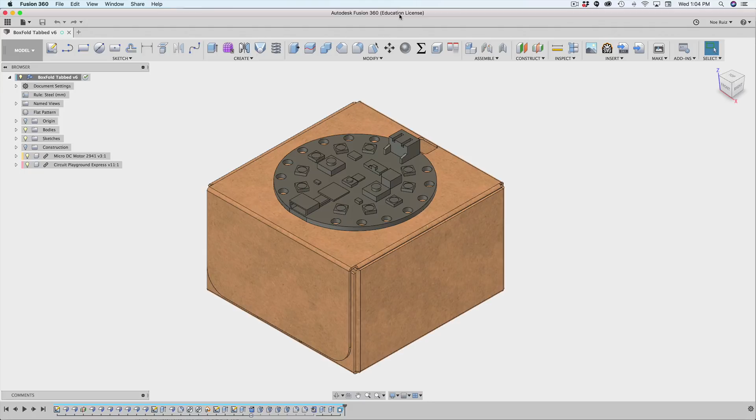In today's tutorial, we're going to take a look at using sheet metal tools inside of Fusion 360 to make enclosures out of paper, or chipboard in this case, to make enclosures for your electronics. So here I have a little paper box that is fully assembled using the sheet metal tools inside of Fusion 360. I have a couple of components here.

I got my Circuit Playground Express that's mounted on top, and I have a micro DC motor mounted on the side. And then in the inside of the box, I could fit things like the battery or wires and things. So what's pretty cool about this is that you can unfold this design and export it out as a flat pattern for cutting on vinyl cutters, like the Cricut machines. So let's take a look at that.

I'm going to switch over to the sheet metal tool, and I'm going to activate my flat pattern. And what you'll see is Fusion will go ahead and unfold. It'll take the box and turn it into a flat pattern, so we can export this out as a vector, as a DXF file. And then we can bring that into our software for cutting this template out of chipboard.

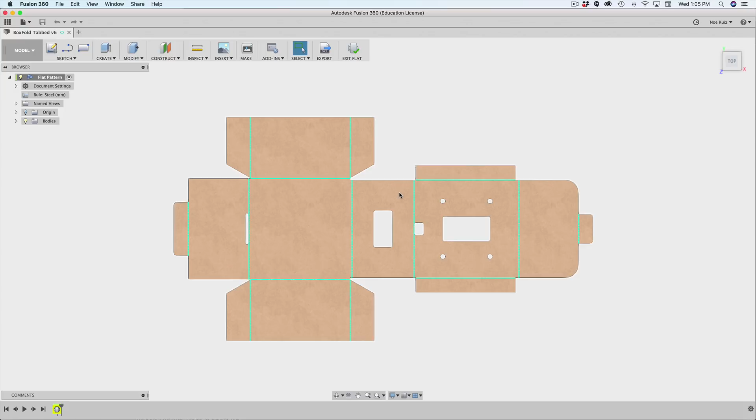Chipboard is a material that's made out of paper, but it's thick enough to do sort of 3D dimensional boxes or even paper crafts. So it's really cool. So I'm gonna hit exit flat, and then it kind of brings it all together. So it's really nice. This box is actually one piece, and it has a little sort of tab insert that gets slotted in here, and it kind of just secures itself.

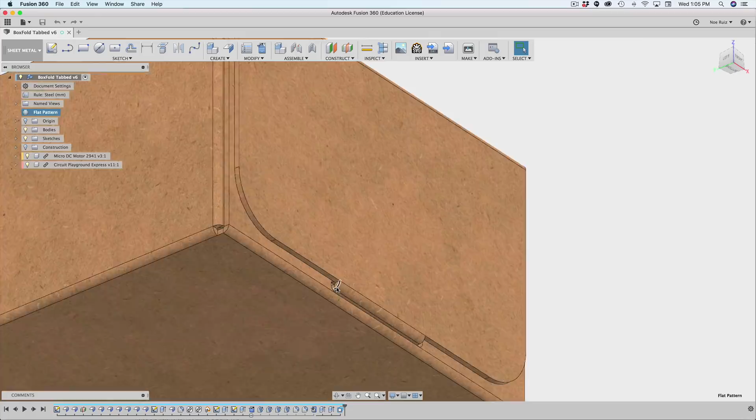It's a nice little housing for electronics, and when you can cut it out of paper, it makes it a lot easier than having to do something like 3D printing or CNC milling. So that's really cool. So let's take a look at how we can design a box inside of Fusion 360. So I'll make a new design, and I like to use my grid just to kind of see where I am in space.

So there's my grid, there's my floor, and what I'll do is I'll switch from model to the sheet metal workspace. And inside here, you'll notice that our tools kind of change a little bit. For the majority, most of the tools are here, sketching tools and whatnot. But some of the create stuff is different, and the modify stuff is a little bit different. But we'll get into that.

So let's go ahead and start off by making some user parameters, because we're going to make this a parametric design. So I'm going to pull up my toolbox and type in param for change parameters. Open that. Let's go ahead and make a new one. I'm going to make this the width. Let's go ahead and make it 50 millimeters. And I'll make another one. Let's call this length. This will be 60 millimeters.

Let's go ahead and change that 50 to 60 because I actually want them to be the same on the width and the length. So let's go ahead and add another one, make it height. This will be, let's say 30 because it's a little bit smaller, so it's like half the size. That's okay. Now we can start sketching out our box, right?

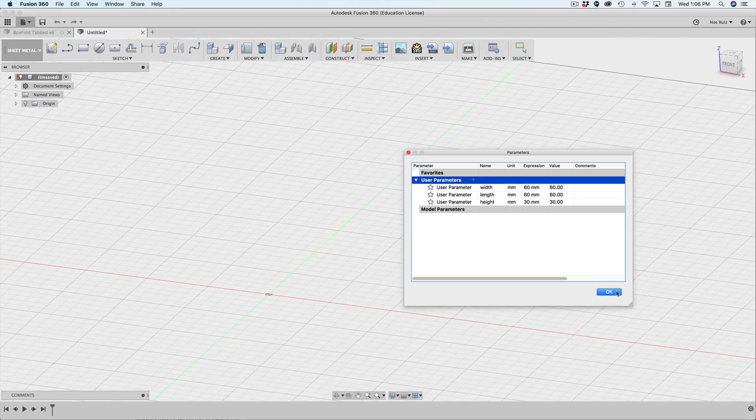So I'm going to use the sketch tool, and I'm going to draw on this flat plane here, this kind of floor plane. So I can look at it from the top using my view cube, and then I'll use the rectangle tool using the hotkey R, and then I'm just going to drag this out, and I'll just make it like that. I haven't assigned any dimensions to it, so let's go ahead and do that.

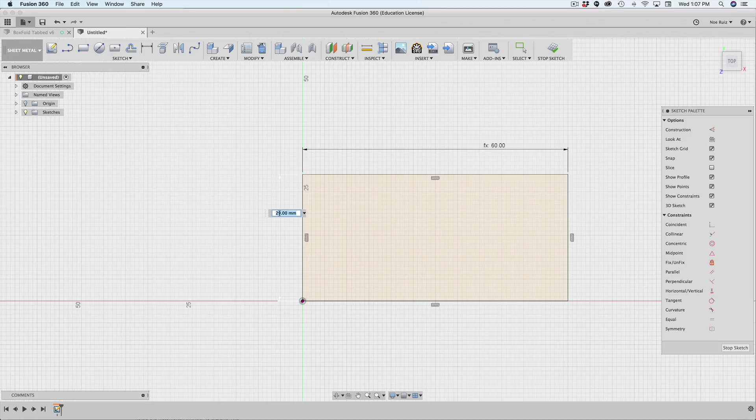I'll make a dimension for this guy up here. Let's make this the length, and then this right here will be the width, this guy, right there. So let's make that width, and that should be 60 by 60. And now we can hit stop sketch.

All right, so now what we want to do is we actually want to create this to be our base for our box, right? It's gonna be kind of the floor, the sort of base bottom of our box. So what I'll do is under create, you got the Flange tool. We're gonna be using Flange a whole bunch, so get used to it.

Instead of extruding, you can extrude, but the Flange is what's gonna kind of start our box here. So I'm gonna use the Flange tool, and this is gonna extrude it out because I already have the profile selected. If you didn't, it would look like this. So you gotta hit the little plus button and then select your profile, which is our little rectangle here.

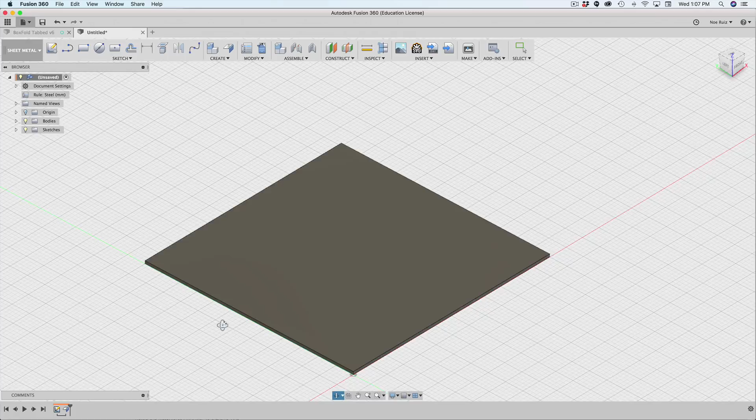All right, so the next thing I'm going to do is I actually want to hit OK, and that's our base. But by default, you may have to modify your sheet metal rules. So under the modify menu drop down, we have something called sheet metal rules, and this lets us set how thick we want our material and how much of a bend we want in our material. So I'm going to hit the steel right here and then hit the little pencil icon to edit it. I've already went ahead and updated this.

I'm actually going to change this to chipboard. And my chipboard is 0.8 millimeters thick, and I have a K factor of 0. This is kind of saying how much of the material we're going to stretch. Since we're using paper, a chipboard, it doesn't really stretch, it tears, so we're going to put 0 for the K factor.

Another thing we want to do is drop down the bend conditions. I want to drop down the bend radius to 0.2 millimeters, because that's a good kind of radius for our bends, but we do need one. Normally it's set a little bit higher than that, but we don't need it to be so high, so I brought it down to 0.2. And all these numbers will change depending on the type of material that you're working with. But in this case, it's chipboard, 0.8 millimeters. Let's hit save.

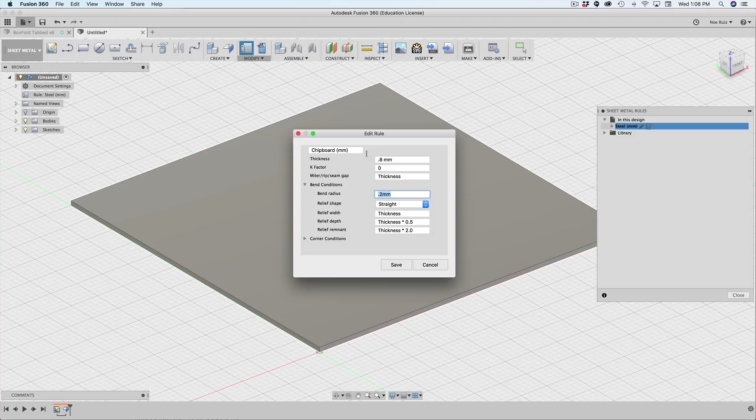Close that out. And another thing I like to do is make this look like the material. So I'll bring up my appearance window using the hotkey A. That'll bring up the appearance window. And in the library, I like to just search for board. Hopefully I get something. I get this MDF board, so I'll just drag that into the thing.

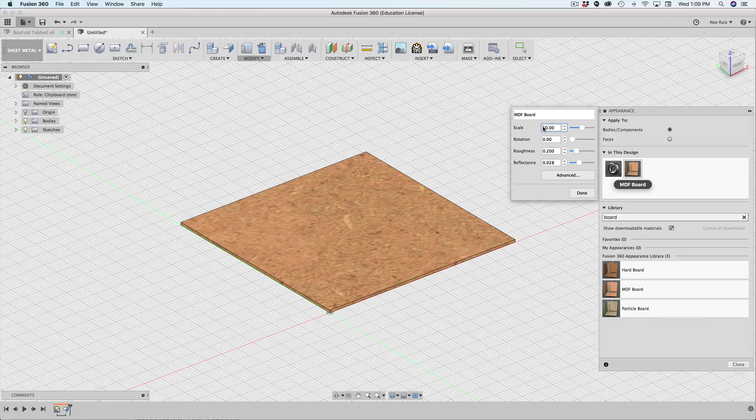It looks a little bit scaled up, so I can right click on that material, and then I can mess with the scale. So I'm going to change the scale from 50 to 40. And you'll see that that texture is a little bit smaller, scaled down, and it just looks a little bit better. So, okay, now I can close that out.

So now we got our base, and what else I want to do is talk about making side walls using the flange tool inside of the sheet metal environment. So here's what we'll do. Let's bring up our flange tool, and we're going to select the 4 top edges on the top surface of our base. So it's this one, and then these 2 over here. So this one and this one.

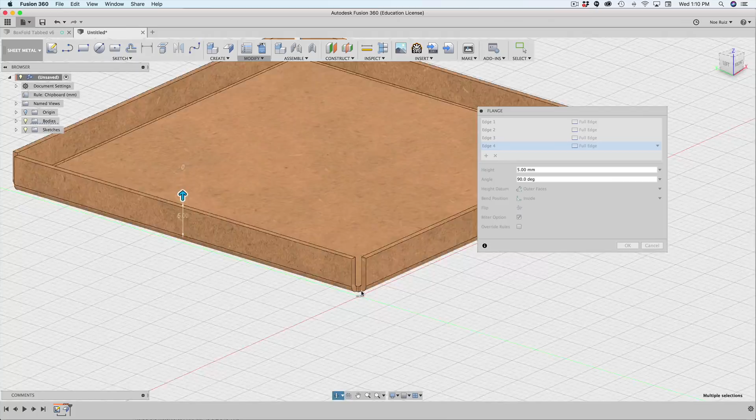So I'm going to start bringing these up. And what I want you to focus on is the corners. When you flange out edges on the sides, and you have some that are adjacent to each other, you have something here called the bend relief. So this little corner geometry gets added because sheet metal, in most cases, would need a little bit of relief here in order to actually do this shape.

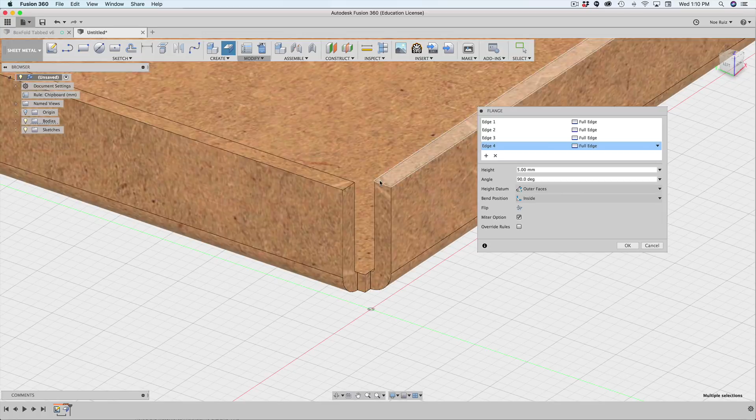So you can see here as I stretch it out, this is apparent in all 4 corners. So what you can do is change the bend position to be adjacent, and that'll just kind of bring it out. But in this case, it's still going to give us that little bit of corner here. So we can play around with these, but I don't think it's actually going to work because we're doing all 4 corners. So we can turn off the miter option, and that'll bring these edges really close together. This is just an example to show, to be aware that there is something like that.

And when you're cutting something using a vinyl cutter, you kind of want to be aware of those little corners. So again, if I leave the miter option on, you get that little bend relief there. If you turn it off, it kind of goes away. So I'll have these set out on the inside.

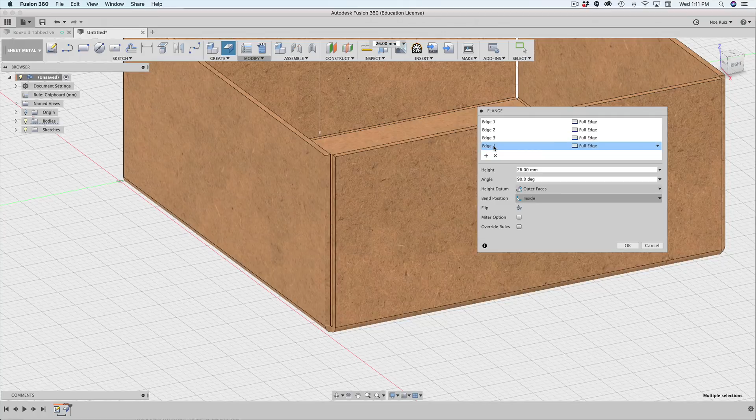And actually what I'm going to do is delete some of these edges here. Looking at the view cube, I want the front to be our area where we have that tab insert. So I want this side to be the cover, sort of the opening tab here. So I want these to be the sidewall. So I'm going to get rid of this one. I'm going to deselect this guy and the one in the back there, just like that.

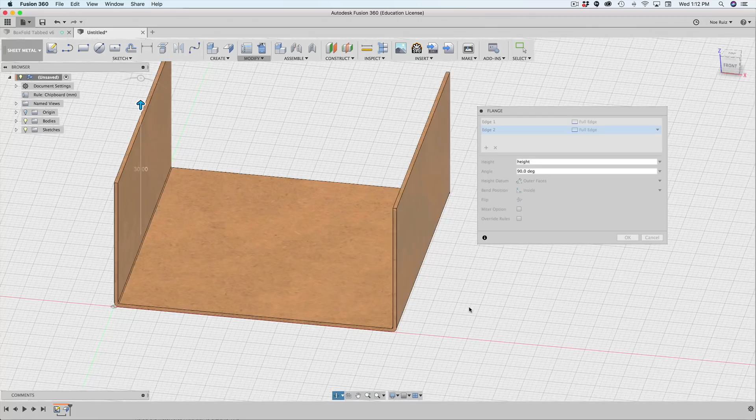So now I have 2 side edges, and I want to change the height to our height parameter. Okay, so now if you look at our edge, you'll see that it's nice and flat there, and that's what we want. All right, so I'll hit OK on that. And again, the bend position is set to the inside. If we ever need to change it as we're creating our flaps and folds, we can always go back in here and change this. So for now, I'm going to leave it on inside.

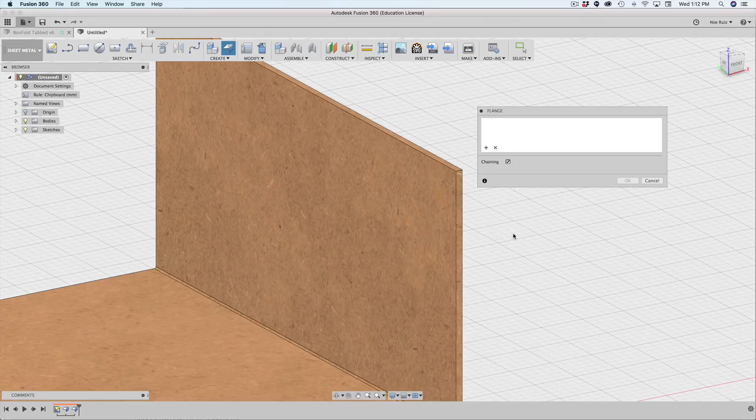So I'll hit OK. All right, next what I want to do is create these side flaps that will hold the side walls together. So I'll just use the flange tool to show you which sides I want. So I want this edge here, and then the opposite edge there. And then also on the other side, we'll select these guys here. You don't have to hold down Shift, which is nice. It just appends it to the flange list. So I have those 4 edges here. They're all listed here, and you can cycle through them.

And then what I'll do is add a height. I want it to be the height divided by 2, which should give us 15, because our height is 30. So now you've got these flaps, and you'll see what it's doing. If I look at it from the side, you'll notice that the flange tool is smart enough to not weld this bottom side with the base, which is really nice. If you look at it from this side over here, same thing.

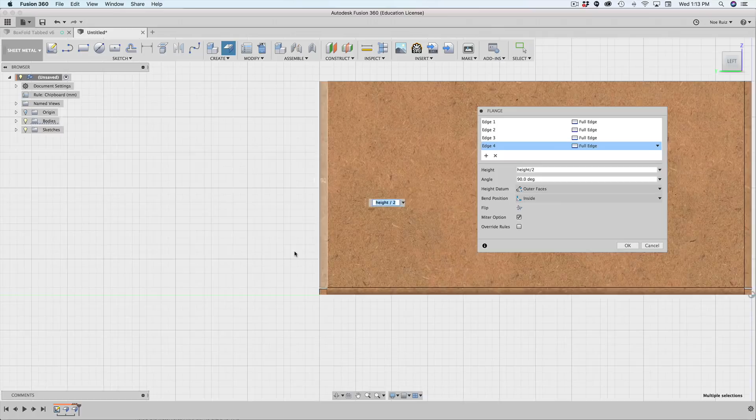Now, if we rotate and take a look at it from this side, you're going to see something a little bit interesting: we have a little bit of edge here that's actually protruding out, and it's flush with our surface that's creating our side flaps. So you see there's a little bit of relief here, which is actually good. We actually want this, because if we were to set this on the outside, you can see the flaps actually start going on the outside of this.

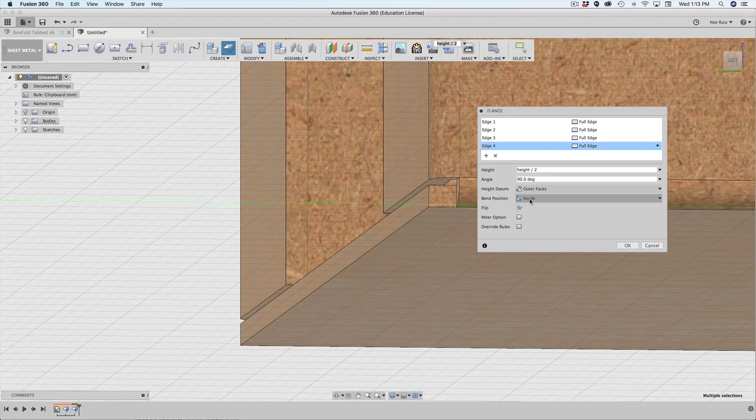And if we turn off the miter option, sometimes it'll get rid of this little area here, and other times it won't. But in this particular case, we're going to leave it on the inside, and I'll show you why in a second. So now that those are created, it's also going to be the same on this side, because it's symmetrical that way. And now that we have that, I'm going to go ahead and hit OK.

Now what I want to do is create this flange that will come out, that will cover these two flaps, and it'll actually be the top cover for this whole top area, and it'll fold down a little bit and then come back in with the insert tab. So let's do that. I'll grab this edge up here, right? It's on the base, and I'll grab my flange tool and I'll start pulling it out.

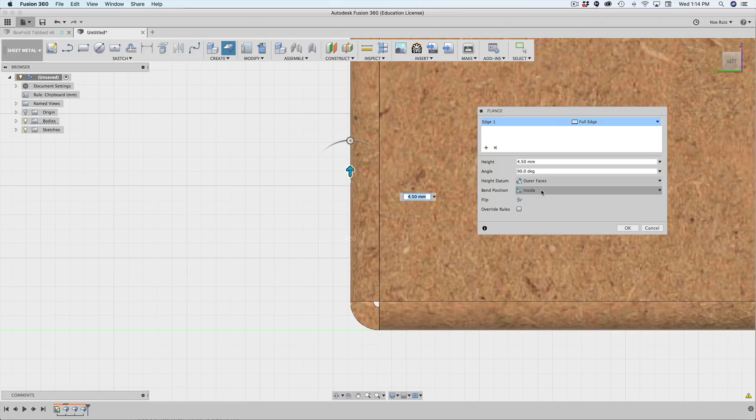Looking at it from the side, you'll notice that it's going to try to weld this in, and that's because by default it's setting the bend position to inside, because that's the last option I set. So we can just set this to outside, but you'll notice here that the wall is actually welding to this, and that's bad.

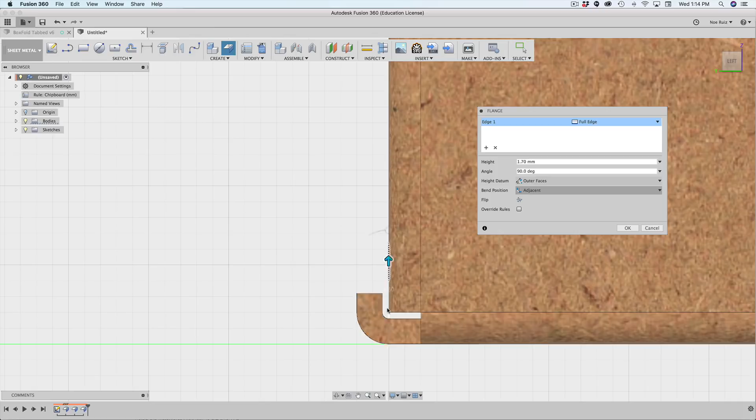There's not a gap, there's not a clearance between these two edges. So if you use the adjacent option, it'll actually be smart enough to give you that little bit of relief there, that little bit of clearance that you need. And it's really nice that it's working here.

If we had this initial bend here, these flanges were coming on the outside, then we probably wouldn't be able to do this, because we wouldn't have that extra bit here on the base to be able to flap over these guys. So let's go ahead and bring this up. Now I could put height here, so let's go ahead and do that for my height, because that's our parameter that we set up. And if we look at it from here, it's nice and flush up there.

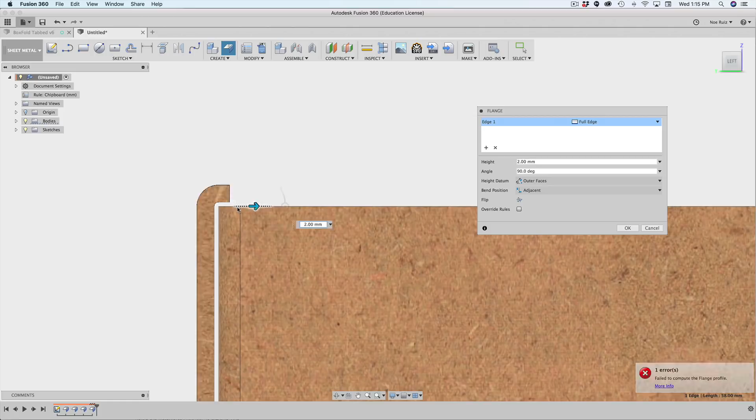Because we can use the bend position adjacent, we can create another adjacent face that will cover this. So let's do that. I hit OK, or hit Enter to append that. And now what I can do is I can grab this edge and create another flange. And then again, looking at it from the side here, we can start pulling this in and see if it's going to do what we want it to do. In this case, because we selected adjacent for the last flange, it'll keep that there as the bend position for this flange.

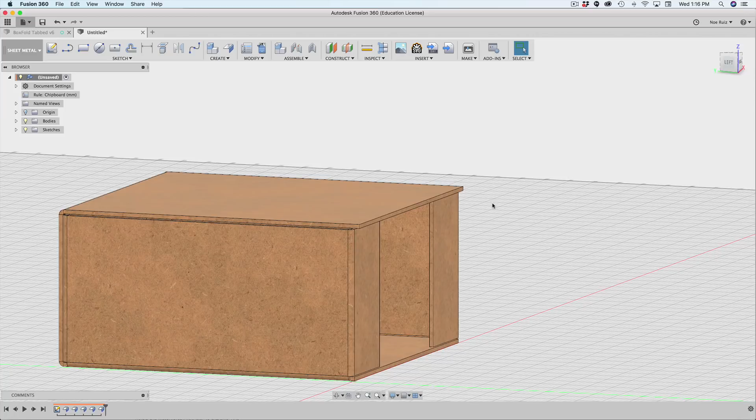So I'm going to bring this out a little bit more. Whoops, I hit right click. I can bring this out a little bit more than I need to, so somewhere around 62, and then we can modify that, because I actually need to bring it back down, so making sure that our flange extends beyond these two flap sidewalls here. So I'll go ahead and hit OK. That gets appended.

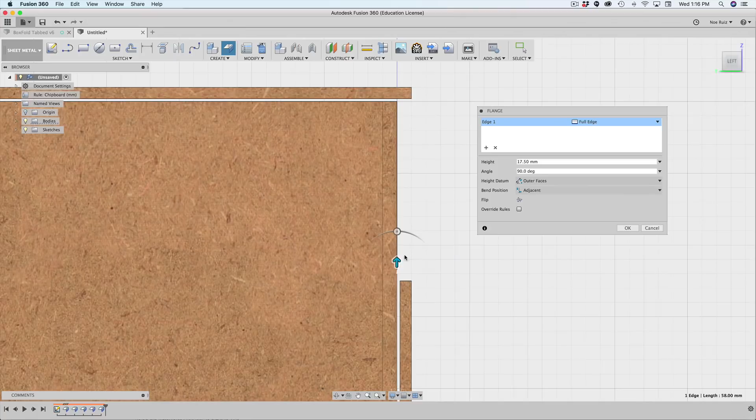Now before I drop this down, I actually want to extrude this piece up. So with that edge selected, I'll go ahead and do the flange again. Looking at it from the side, I'm going to bring this out, and you'll see it's still set to adjacent, which is good. I'll bring it up, not all the way, maybe about this much. That way I can have a little bit of room here to bring in a tab that will fit in between these two side flaps.

So let's hit OK. And what you notice is, well, if I do the flange, it's going to cut into these guys. So there's a little something special that you can do with the flange. So I'll select this edge here, and I'll bring out the flange tool. I'll leave it here since it gives us a little bit more viewing area to play with. So I can bring this in, and you'll see that it is cutting there. But you can change this option from full edge to 2 offset, and this will give us 2 handles that we can offset this flange.

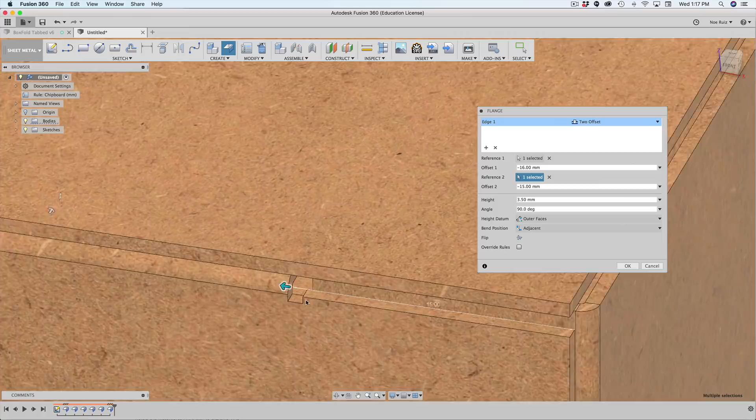So if I drag the reference point 1 arrow, you can see immediately what it's doing. We can offset or bring this edge in for this flange. So I'll do the same with the opposite here. And I want to make sure that it comes in a little bit here. I'll actually leave it at 15, which we can add a little bit of extra clearance here.

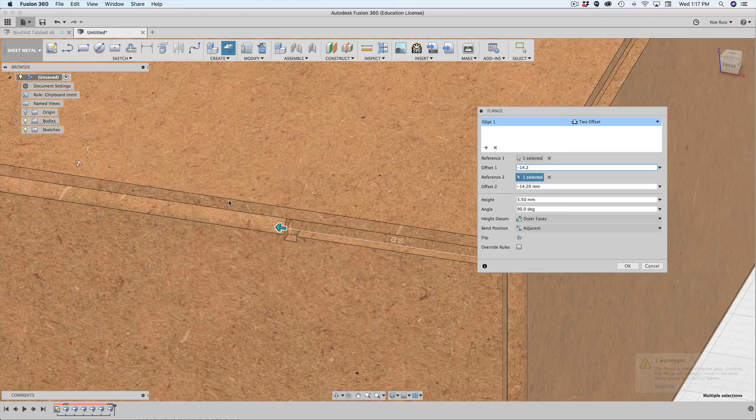So it's at 14. Let's go ahead and put 14.2, and then for the other offset we'll also type in 14.2, because we know it's symmetrical. We know the other flap is that big. So if we look at it from this angle, we can see that, yep, we still have that 0.2 millimeter clearance between all the edges, which is really nice. But you'll notice that we got that little bit of relief here.

I think we can fix that with changing the bend position to outside. No, okay, adjacent was pretty good. Let's go ahead and do something that's different here. We're going to do override rules. So we're going to turn that on, and this allows us to mess with the bend relief override.

So let's turn that on, bend relief override. We'll leave the relief shape to straight, and we'll change this relief width to just 0.1. And then for the depth, we'll just put 0. And right away, you can see that with that 0, we kind of got rid of that relief there, because we really don't need it in this case.

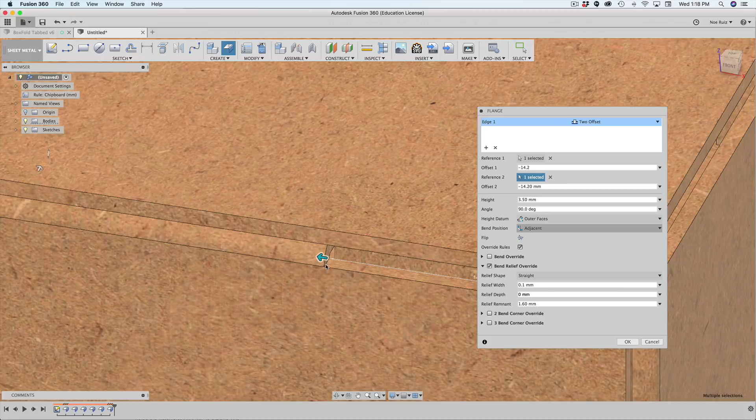Because we're cutting this out of paper. If you were cutting this out of sheet metal, you'd probably definitely want that. But for this material, this chipboard, you don't need it. So it's cool that you have this ability to override the bend reliefs. And you have a couple options here to play with too. But for this particular project, we just leave it as straight.

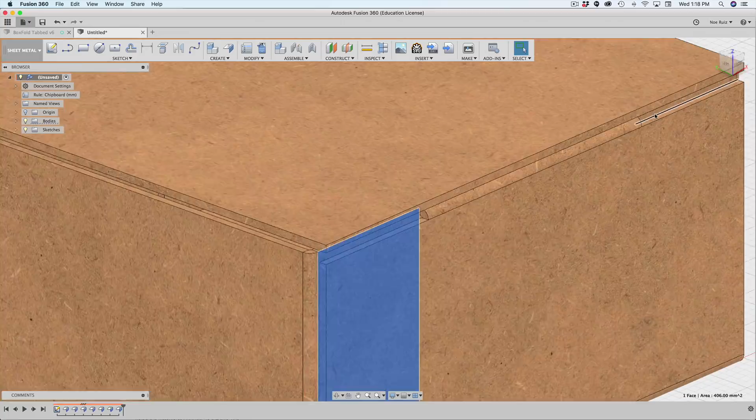So I'll go ahead and hit OK. And now we have our little flap here that gets inserted in between these two sidewalls, which is pretty cool. Now, I've been creating quite a bit of flanges here. You can see I got a handful of them.

And one of the important things that I've come to do is to really test the unfoldability of this design as you create these flanges, especially when you're first starting out. You definitely want to test unfolding your design before you create too many of these flanges, because if you get a weld somewhere, you'll have to search and find where that weld's coming from.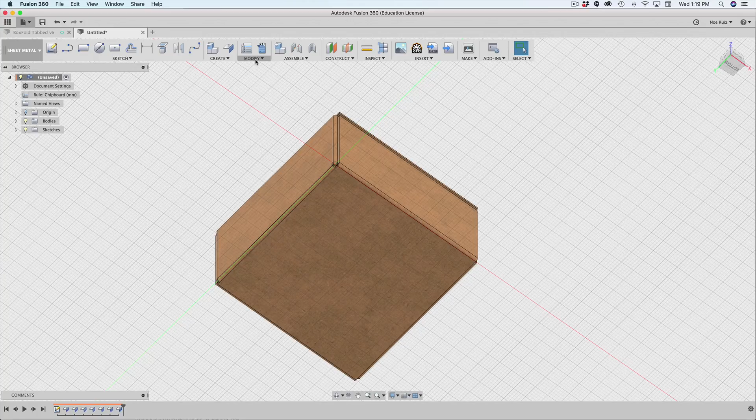So you can do that by going under Modify, and then there's this Unfold. We can select this bottom surface here, and then check this box here. It says unfold all bends, and you get a kind of a preview of your design. If it doesn't unfold, then some of the edges are getting welded. That means there's not enough clearance between this.

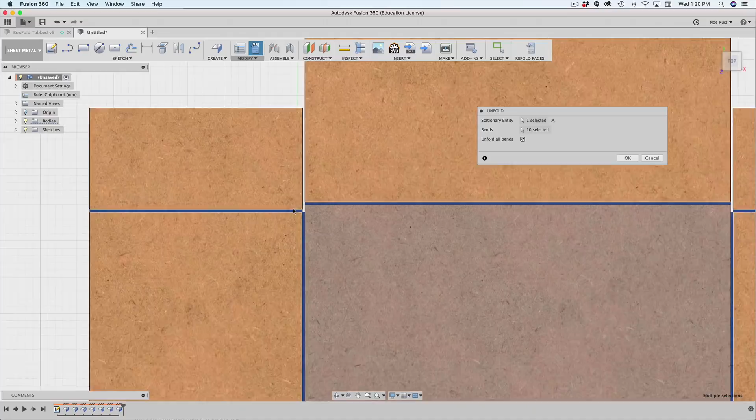So if you look at this straight down, you can see that all of our folds, the folds that are adjacent to each other, do have this clearance between them. And you'll see it's a very small clearance, but it's definitely necessary in order to be able to unfold it, because if your edges are touching, then it just won't be able to unfold. And you even get this highlight of where the folds are going to be, which is pretty cool.

And then if you hit OK, you can actually start modifying this. So we're going to do that, but after the next flange. So I'm going to go ahead and hit cancel on that, and that'll bring us back to your folded design. And go ahead and get rid of the layout, just to get a better look of it as I rotate underneath it, and the grid doesn't get in the way.

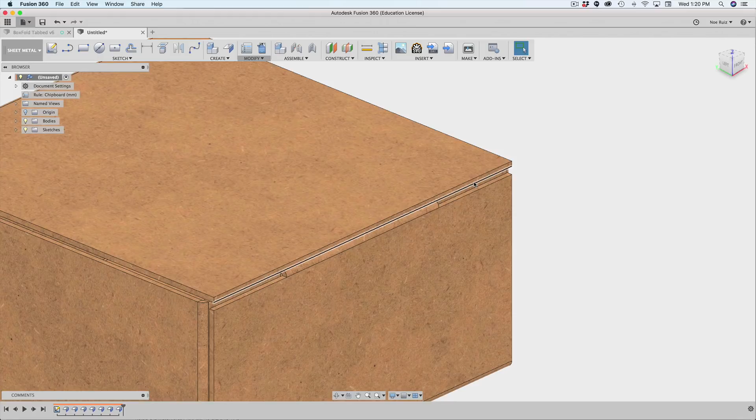So the next thing I want to do is create the second to the last flange. It's going to come down here and overlap this whole area here. We're going to have this kind of double reinforced front side. So let's go ahead and select our flange here, and then do a flange. Let's look at it from the side and see if we have enough area to work with. We probably won't. So let's see what happens when we bring this down.

Awesome. Looks like the bend position set to adjacent is working in our favor. We have that 0.2 millimeter distance between this. I kind of got lucky there because I wasn't sure if that extra extrusion was enough or not. But if it wasn't, we could just go back into that flange and add 1 millimeter to that or whatever. But in this case, we don't have to worry about that because we got that nice little clearance.

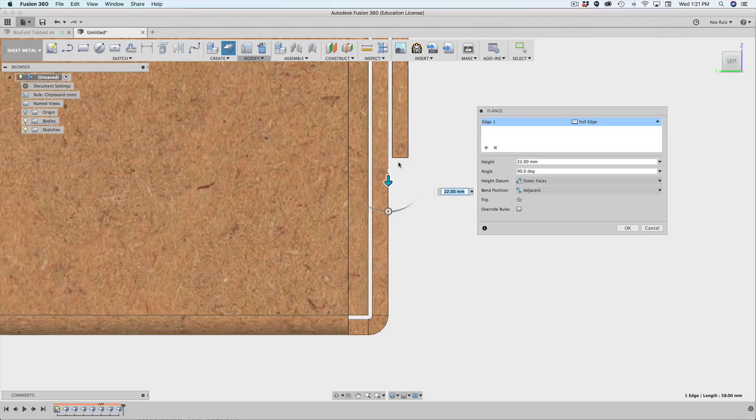So we're going to bring this down. Let's actually bring it down to somewhere near the middle. It doesn't have to go all the way down. I kind of want it right here. I want that tab to be present here. So I'll hit OK. So that looks pretty good.

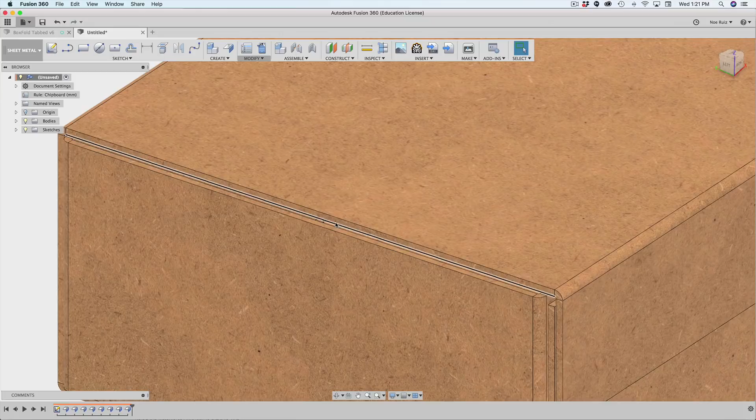And the next thing I want to do is something that will make this box much more sturdy, much more structurally sound. And to do that, what we need is some side flaps on these edges of this top cover to go and tuck in between this edge and this edge.

And that'll help. If you look at boxes that are assembled out of one piece with no glue, you actually see that they have extra flaps that tuck in between these two flaps. And to get a better visual of inside the box, we can open the bodies folder, right click on it and say opacity control 50. That way you can see where our side folds are.

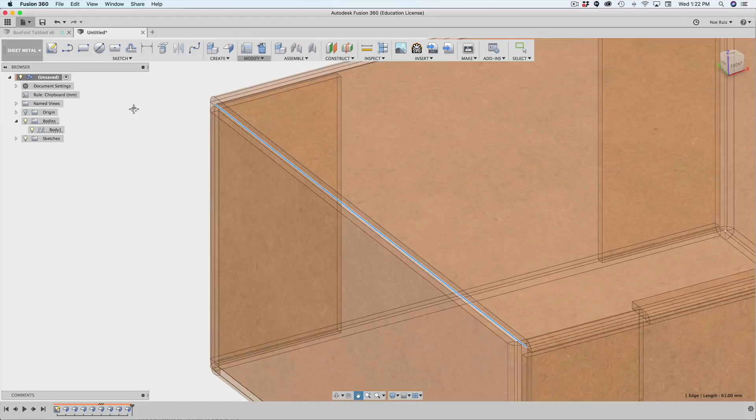So if you can see, this guy here has those two flaps, same thing with this side. And by having flaps that protrude on the inside and tuck in between these walls, you have this really sturdy box. But in order to do that, we have to modify our flange a little bit here. So let's try to add a flange to this edge here. Again, it needs to tuck in between these two walls, and we don't really have enough clearance here yet, so we'll figure that out as we get there.

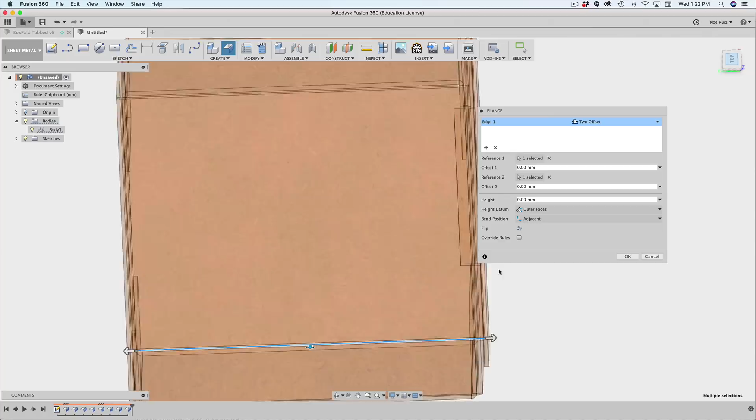So with that side selected, I'll go ahead and bring out a flange. And right off the bat, I know I need to change the full edge to 2 offsets. So I'm going to start doing that. I know on this side over here, reference point number 1 needs to come in quite a bit, probably about that much. We'll fine tune it a little bit more. And then on this opposite side, I'll bring this in a little bit more too. So now I can change the height to something like 10 for now.

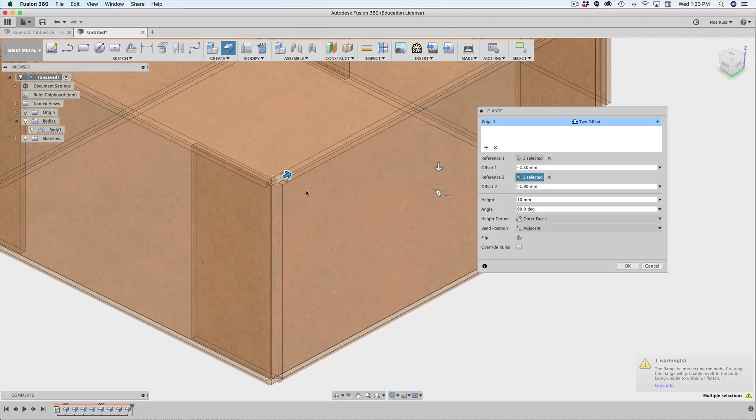It's hard to see it, so as we go down, you'll see that it's actually welding to this face because there's not enough clearance. So let's go ahead and play around with our bend position. Let's say we want it on the inside. Right away, you can see visually that's probably the one we want. And you'll see that the flange tool is smart enough to push in this side bend over here so that it gives us clearance between these edges.

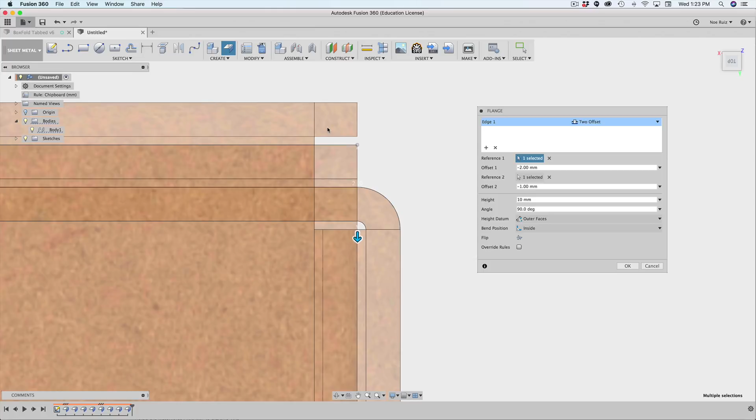So if we look at this from the top down, you can see that we do have that little clearance going on here. We can even bring this edge back down to where these lines match up. It's a little bit more flush that way. So it's at 1 millimeter. And then over here, it probably needs to be a little bit more because we have that extra flap here. So bring this out, and that one's about 2 millimeters going out because we actually have that flange started over here.

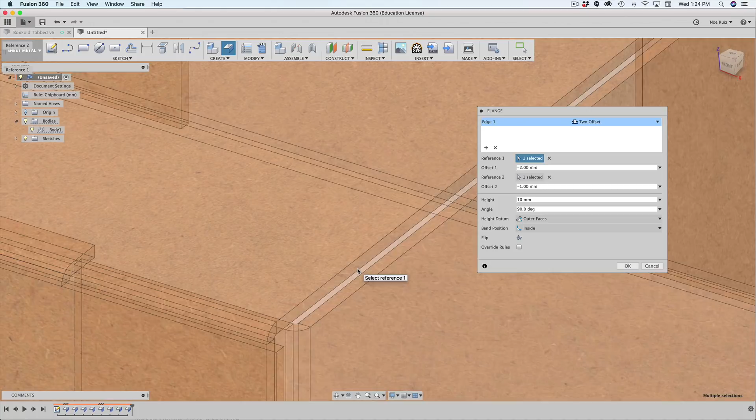So it's really important to zoom in and take a look at all of your edges and make sure nothing is touching so that it doesn't get welded. All right, I think I like 10 millimeters, that looks pretty good. So I'll go on the opposite side, hold down Command, and then select, oh no, it's not working. So I'll hit the plus button here, and that'll allow me to select this edge here. And the problem is that it automatically set it to full edge, so it's going beyond the areas that it needs to tuck inside of.

So I'll go ahead and change that full edge to Two Offset. And I think this one was -2, and this one will be -1. If I select our edge 1, that'll give me the precise numbers. That's 2 and 1. Back over here, 2 and 1. Okay, so that looks good. And again, keep that bend position from the inside because that's what we're tucking in between those two. So I'll hit OK. Fusion's gonna fix that up, and that looks pretty good.

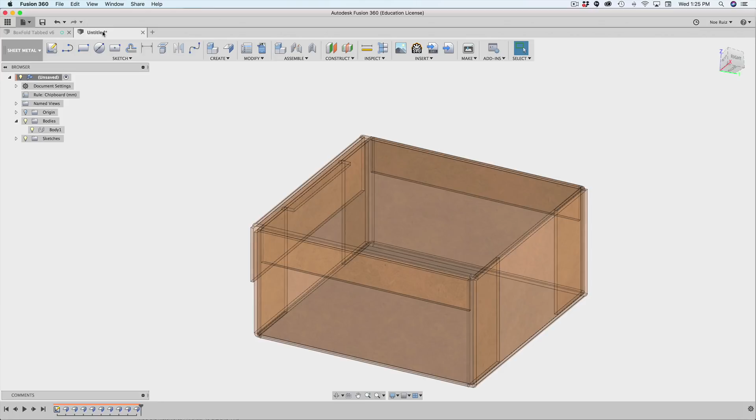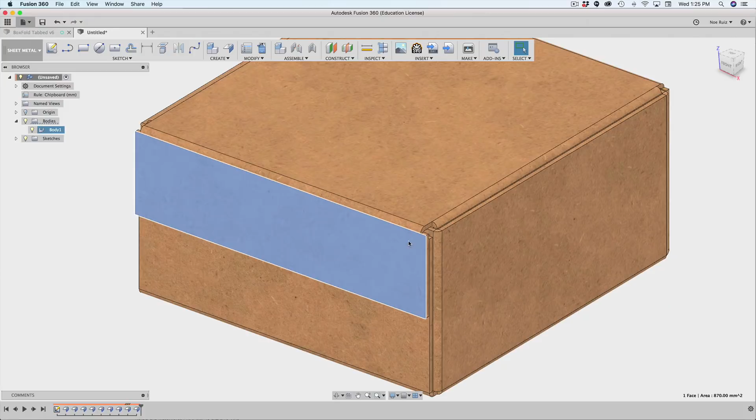It's a little bit hard to see exactly how it is with that opacity control. So I'll turn that off by changing my opacity back to 100, and you'll see that we can modify this a little bit better. So what's going on here is that you have this edge that's gonna be pushed on the inside, and then you have this little bit of extrusion out here. And it'll happen to the other side as well because this face here was the full length before we did that sidewall that got tucked in between here.

So what we can do is we can use the Extrude tool to bring these in. So I'll select this edge, hit E on my keyboard for the Extrude hotkey command, and then I can just pull this in. So it's probably going to be about 1 millimeter. Yep, looks good. So I hit OK. So now you get this flush edge.

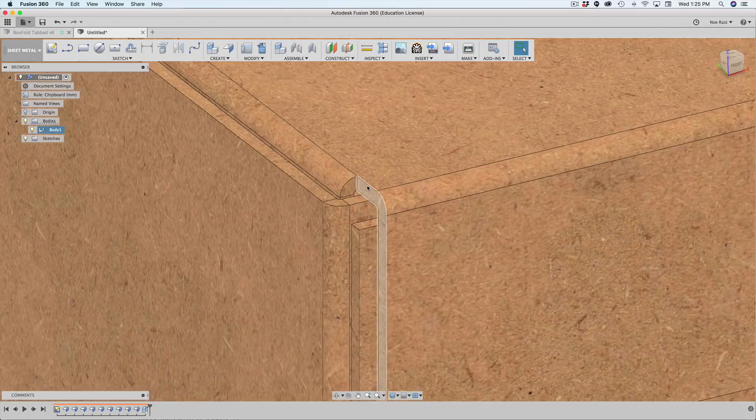And if you wanted this flap to be flush with this one, that's okay. But I actually don't want it to be. I just feel like this looks better to me. So I just made that edge flush by extruding that selection. So you'll see here that the flap is a little bit shorter lengthwise when it's laid over this fold here. We could also do that to the back here.

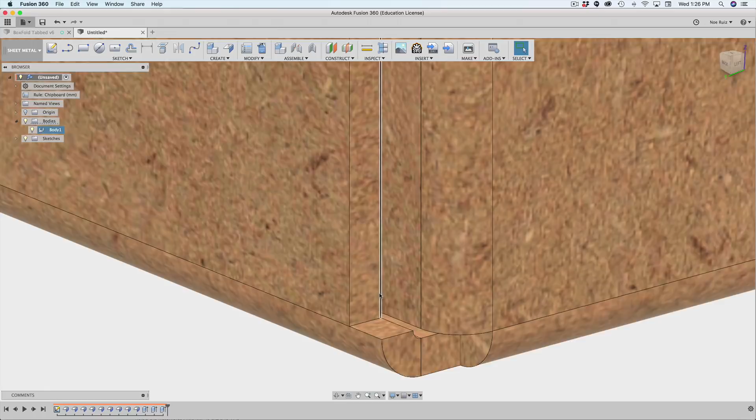You'll notice that this is a little bit extruded out. It's probably 1 millimeter as well. Yep, so I can go ahead and select that edge, hit E on my keyboard, -1, hit enter, and that gets flushed. Same, I should have probably held down. So let's go back into that extrusion, and I'll hold down the command key, and then I can select these, and that'll push the whole thing back down.

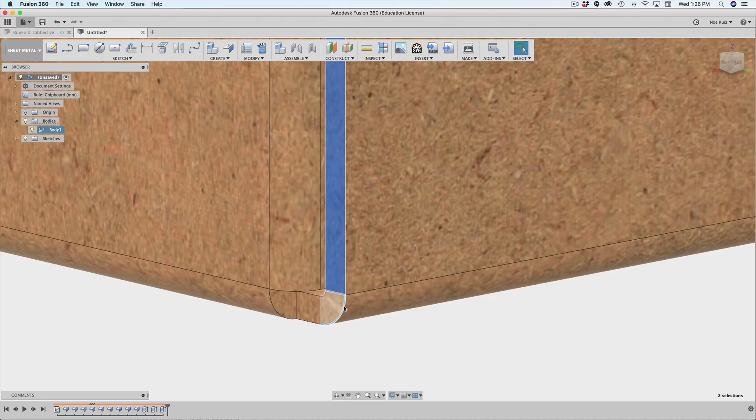So now we have that nice flush edge there, and we can do the same over here if we need to, which, yeah, we do. So we can select that part, and then these other 2 faces, hold down Shift to select them, to do multiple selections, and then I'll hit E, -1, hit enter, and that gets cut away and nice and flush.

Sweet. So the last thing we need to do is I actually want to make a little tab insert, a little tab that protrudes from this. So it's going to be a flange, and then it punches in to a little slot hole on the side here. So let's go ahead and make that slot hole first. So what we can do is we can just select that surface, that face, and then click on create sketch so we can start sketching right on there.

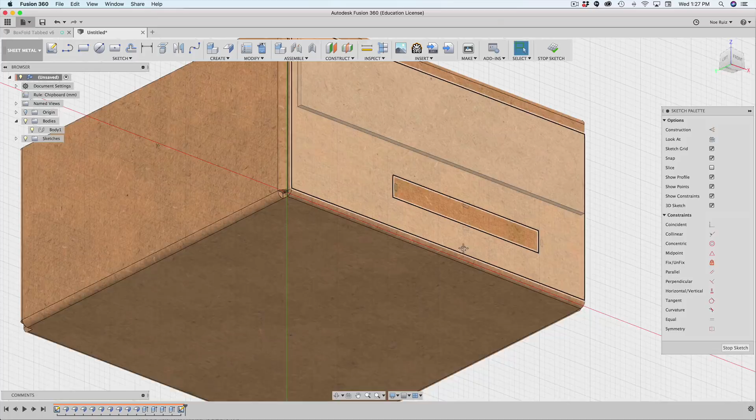So I'll use the R key to create a little rectangle, and I don't know exactly how big I want it to be yet, but I know I want this to be in the center of these 2 guys. So what I'll do is I'll look underneath this, and I can grab this edge and then project it in with the letter P, and that projects it in so it's purple.

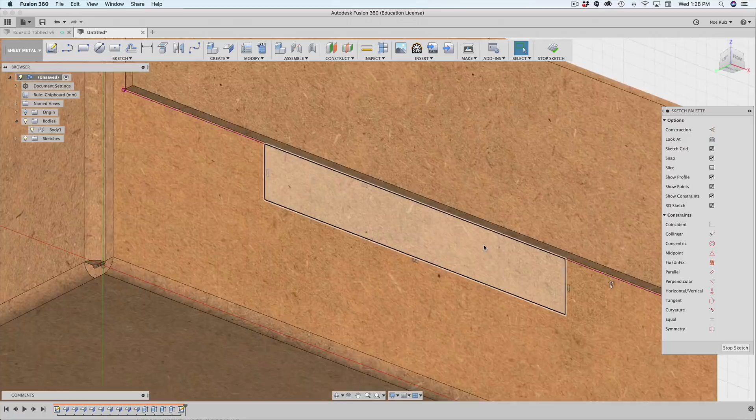And now what I can do is I can say I want this edge to be in the center of this line here, and also go to that line. So I can do that with one constraint, this guy over here called the midpoint. If I hit midpoint, that pushes it into the center and lines up the 2 edges so that they touch. And if I start dragging this out, you can see that it is indeed in the midpoint. So it's always going to be centered with that line. It's pretty nice. So I can make this as big as I want.

I want this slot to be about 2 millimeters. And I'll select this edge and then use the D key to create a dimension. I can make it 2 millimeters tall. And then for the width, I think I'll go for 20, just round that off to 20. So that looks good. And what I'll do is I'll hit stop sketch, and now I can create my hole. So I'll select that as a profile, hit E on my keyboard, -2, hit enter, and that gives us a little cut. And we can see through the box now.

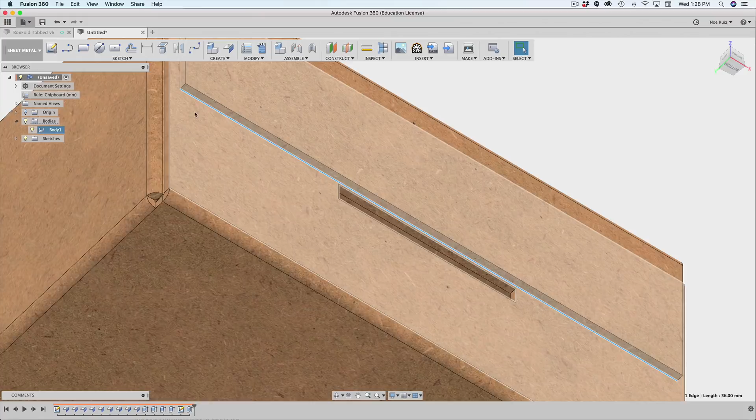That's kind of cool. So now what I can do is I can use this hole as a reference point to create my flange. So I'm going to grab this edge here, and then I'll create the flange. And before I actually start extruding it out, I need to bring in these edges here. So I'll change my full edge to 2 offset, and then I'll bring these in. I'm not sure how much yet, just enough to be within that hole. So let's bring this one in. Let's see here. So this label's literally in my way. There we go. Bring that in.

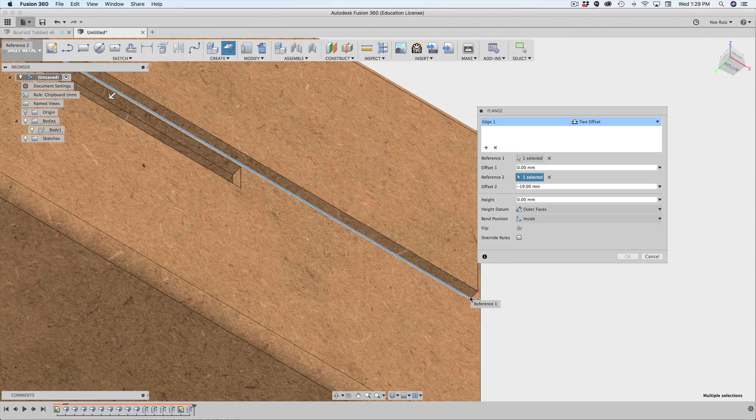And now I can start bringing this one in, which is the actual flange. And of course we gotta adjust it so that it doesn't cut away. So I actually want the bend position to be on the outside. And then what I'd like to do is turn the override rules on. Let's check the bend relief override, and let's change this relief width to 0.2 and then depth to 0.

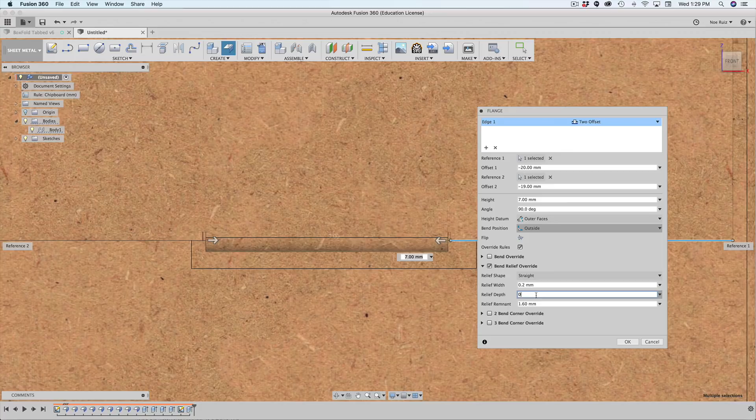And then that doesn't look like it fixed it. We still have a little bit of something here. So what we can do is we can say we want this to be adjacent. Maybe that'll work. Looks like adjacent is the one that we want, because now it got rid of that sort of bend relief. So that's cool.

Now we want to make sure that these reference points, these offsets are nice and squared off. So I actually want 0.2 millimeters of clearance between those two. So that's looking good. That was 18.2, I believe. And then this one should be 18.2 as well. So I'll put that 0.2 there. And we only need to make one flange, because that's just one tab.

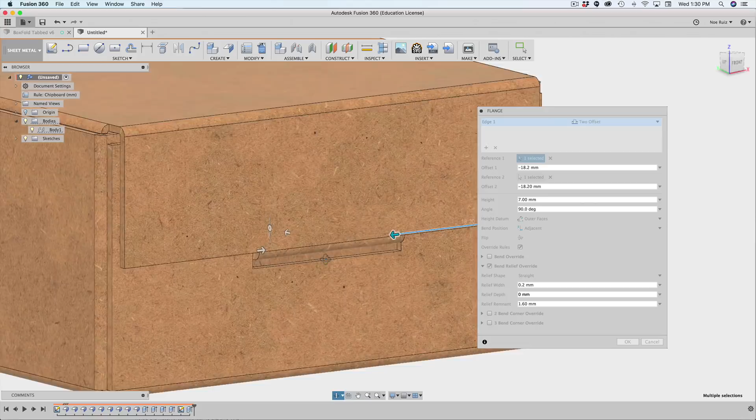So if we look at it by rotating it, we can make sure that none of the edges are actually touching. I'll hit OK. And if we zoom in here, you can get a better look of it. Let Fusion accept that. There we go. And you can see here that, yeah, there is enough clearance. Even this edge here, the inside edge and that edge have a 0.2 millimeter clearance, which is perfect. So that's looking really good.

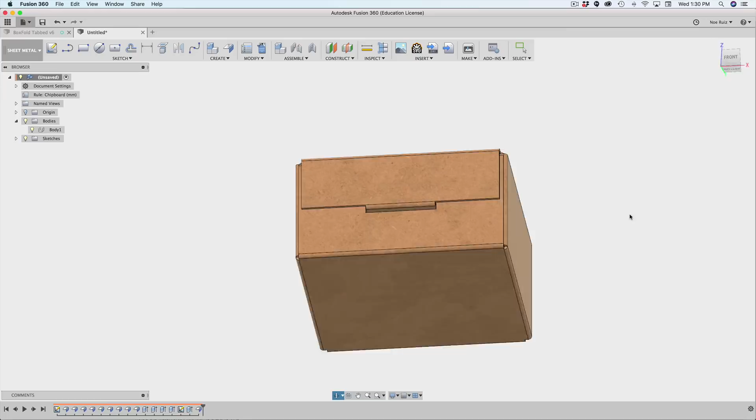Now what we can do is we can test unfolding it. So let's go ahead and do unfolds. Select the bottom, check that box, unfold all the bends, and then hit OK. So this will make it so that it's an object here. It's a feature inside of the timeline, so we can always reference that. Also, we can start doing things to this. One of the things that we definitely want to do is we want to create some drafted angles for our sort of side flaps.

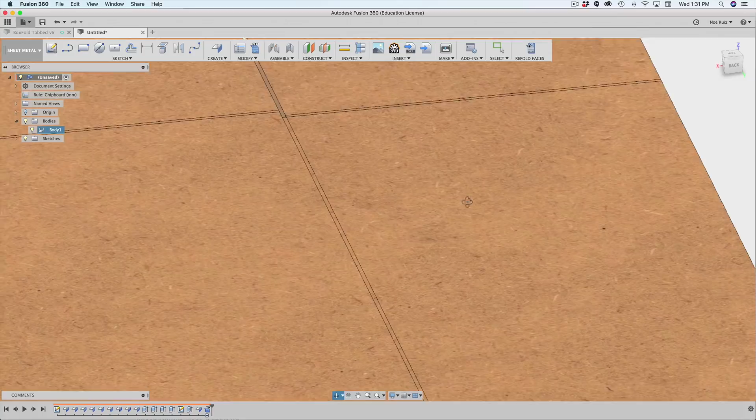So what happens with vinyl cutters is that you kind of want to optimize your edges and your shapes so that your tool isn't dragging the material when it's cutting. And what the tools don't like is really sharp edges like this. So what we can do is we can add a drafted angle here to kind of relieve that cutting to make a nicer cut. So what I'll do is, actually I need to switch from sheet metal to model. And now we can start using all the different tools to either cut this away or do a draft angle, which I'm going to do.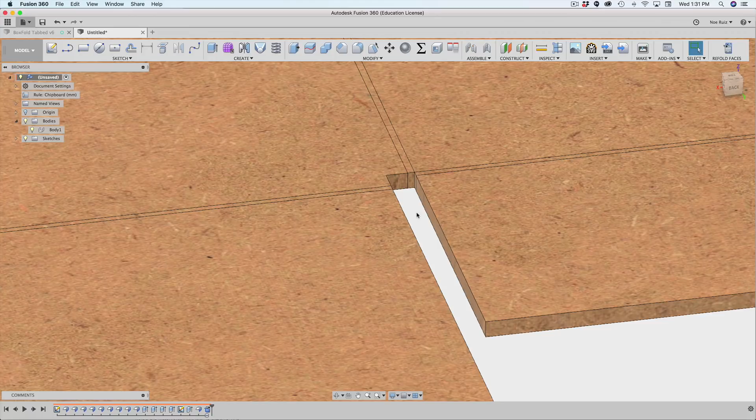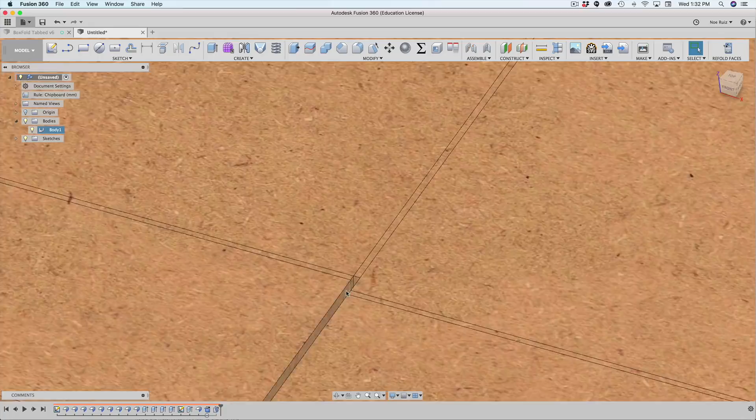So I'll bring up my model toolbox, type in draft, and then select this as my plane, and then this as my face. And now I got this little handle which I can manipulate to kind of create this angle. I actually want it to be 30 degrees going that way. So I'll hit OK, and then we can do the same for this side over here. So again, draft, select this little guy as our plane, and then this as our edge, and then bring it out to 30 degrees, and hit OK.

So that's cool. I actually want to do the same to this side, but instead of having to repeat these two, I can just do a mirror. So to do the mirror, I need to create a midpoint construction plane. I can do that with the construction plane called midpoint plane. I think it's called midplane. There it is. So I'll select this edge and then the opposite edge over here, and that'll create a construction plane that's in the center of those two selection points.

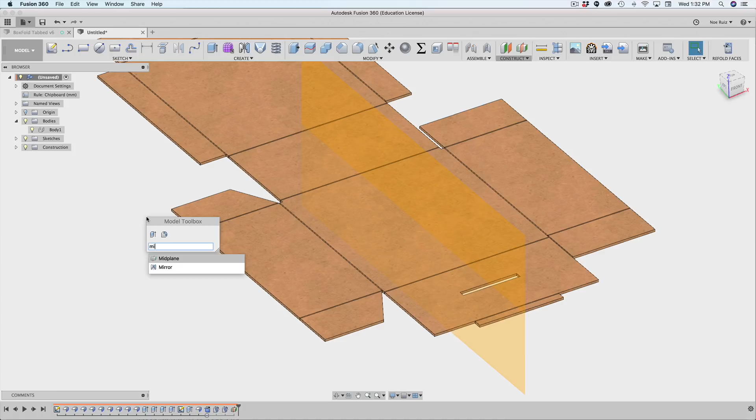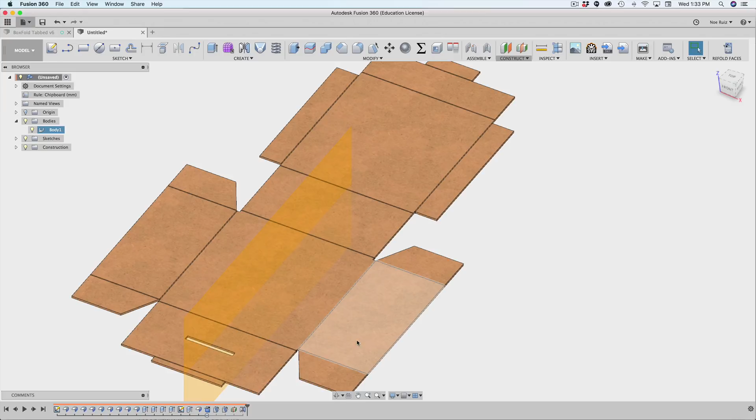So now I can use the mirror command like that, and then select my faces that I want to mirror. I want to mirror this one and this one over here like that. And then for my mirror plane, it'll be that midplane that we just created, which is this orange guy here. We get a little preview there of what it'll look like, kind of. I'll hit OK. And it did it over there, so that looks great. All right, that looks cool.

Another thing we can do is we can round off some of these edges to make this look a little bit nicer. And that definitely helps the tool. If it's got fillets, rounded edges, it likes that because it kind of relieves the tool a little bit. So I'll do maybe one or two. Two looks good.

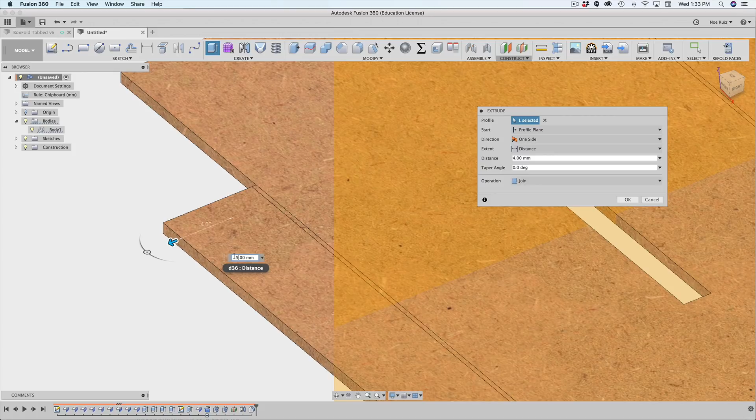And what I'm realizing is this tab looks really, really small. I should probably bring that out. We can either do that in the flange, or we could just extrude this out, whichever is easier for you. I'm probably just going to bring this out myself like that, maybe more, maybe 5. I think I want this to be 10, so it's 7.5. Doesn't really matter. I just want it to be longer. Yeah, it's 10 now. All right, cool.

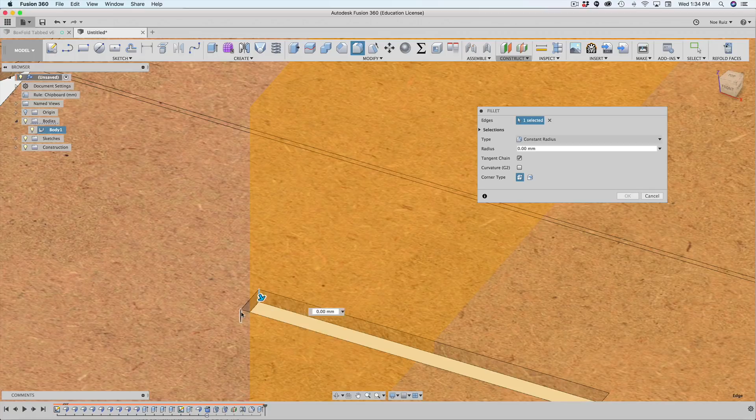So that works out, and we could even add draft angles there. Oh, I definitely want to add a fillet to this one. This will definitely help the cutting tool when it's cutting the inside here, because it's such a small feature. So I got this nice rounded edge there, and that's looking pretty good.

Now that we have that done, we can refold it. So if we go back over to our sheet metal workspace, we can hit refold faces. And if everything we did was okay, we should have a refolded box. So now you can see that my box has those nice rounded edges here. It has a nice rounded edge here.

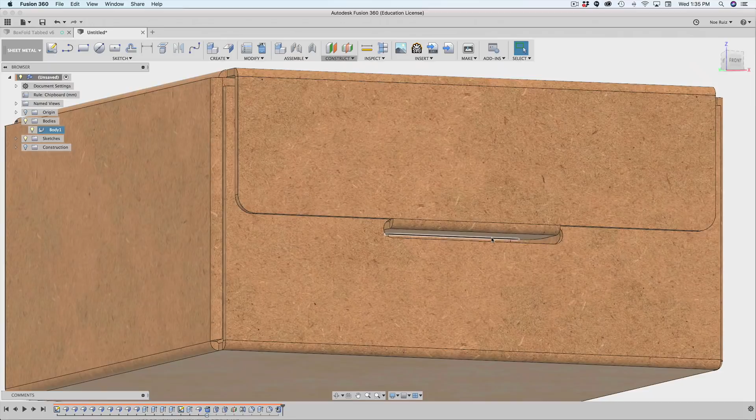And it looks like there's a little bit of a problem here. We can just modify this guy here, which is our dimension. Like I say, maybe I want 22 or 21, and that'll just offset a little bit more. There you go, so that you have a little bit more clearance there, because when you added that rounded edge, it kind of started cutting into this little tab here. But I've actually tested this out, and it works pretty well.

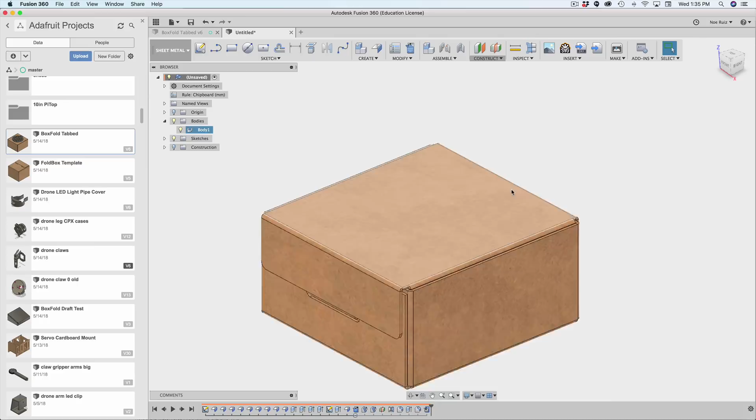So now if we wanted to bring our components in here, like a Circuit Playground Express, we can just right-click on our parts here and bring it in, and then do some extrusions and holes and stuff. But we'll save that for another tutorial. For now, I just wanted to show you guys how the workflow is for creating a box like this. And I'll even share with you guys how to create that flat pattern.

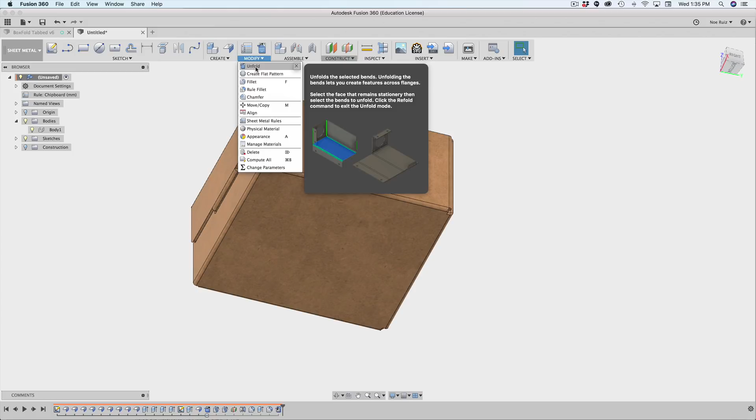So what I'll do is I'll go under Modify, again inside of the sheet metal environment. I'll use this guy here. It's right under the unfold. It's called Create Flat Pattern. It'll ask you where do you want your stationary face. Again, we're going to select the bottom because it's kind of like the main base of everything. I'll hit OK. And this will make it so that we can export this out as a DXF.

There's a button right here that's conveniently placed. You can't do any modifications here, well, you kind of can, I guess. Anyway, we don't have to because we've already done all the things we want. And what I'll do is I'll hit Export DXF. I'll hit OK. And then I'll just save this as like a box tut. And it'll save it as a DXF. I'll turn that hide extension off just so you can see that, yep, it is a DXF. I'll hit save.

Now, specifically for a Cricut vinyl cutter, you need a vector editing program to turn it into a vector SVG file. So you could use something like Inkscape. It's a free piece of software, but I know how to use Illustrator and I have access to it. So I'm going to use Illustrator, which is from Adobe. And I'll use Illustrator to convert my DXF into an SVG. I don't have to clean up, but you'll see.

So box tut, I'll open that. It'll open up in the canvas. Actually, no, this is really, really important. This DXF Import option asks you what do you want to scale this by, because I guess Illustrator doesn't know that you're using millimeters. So if you look at the scale by 100%, that looks good. The scale factor is 1, and then 1 unit is 1 point. That's incorrect. We actually need to change this to millimeters because we're working with millimeters. And once I do that, you'll see that the number gets kind of offset.

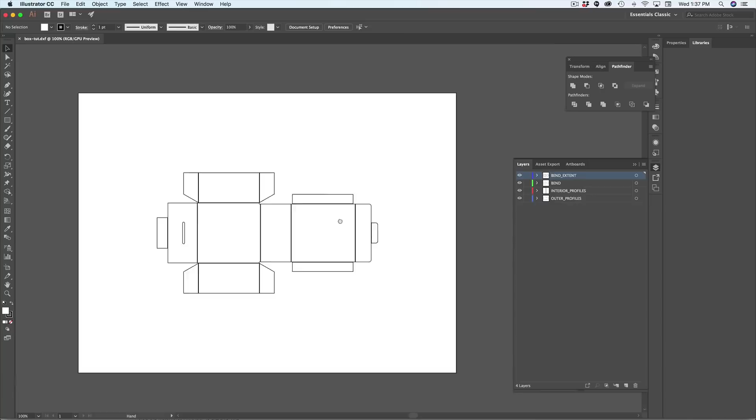So I'm going to change this back to 1. So now I have a scale factor of 1 is equal to 1 millimeter. So that's really, really important. If you don't do that, your thing might not be scaled properly, which is really important because you want to fit precise things. So what's cool about the export as a DXF from Fusion is you get these really nice layers that are named for you.

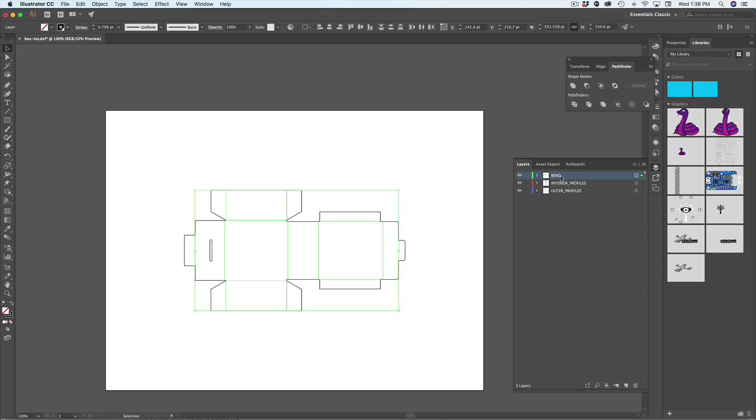So if you're doing sheet metal, you definitely want to have the bend extent. You want to have the bend layer. But since I'm cutting this out of chipboard material using a vinyl cutter, I actually don't need the bend extent. So instead of having to delete these layers inside of the software for cutting, I can just delete that here and now. And then what you can do is you can actually assign these bend lines or individual lines. So you can assign these as folding lines or lines that will be scored using the vinyl cutter.

So that's really cool. And these edges are all nice and clean, so you don't have to worry about cleaning them up. I just wanted to show you how you definitely need to set the scale, if you're using Adobe Illustrator anyway. And then you can save this out as an SVG. So right here, the option is SVG for the format, and then we would save it out as box tut. And then just use the default profiles that we have here for the SVG. So I'll hit OK. And that's kind of it.

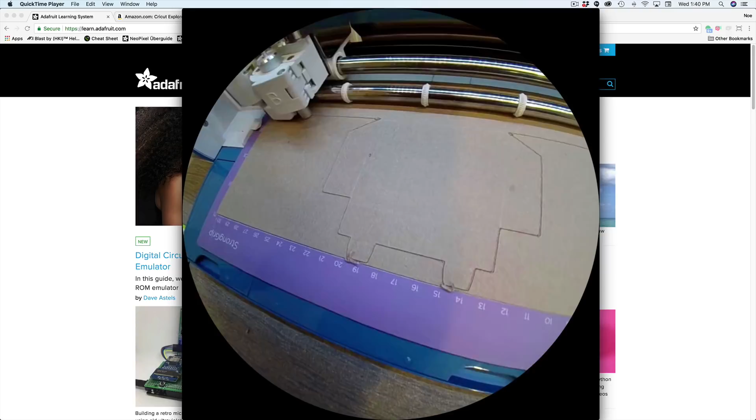So that's really cool. I think this is a little bit thicker material, and testing out different types of designs, different types of inserts, all that sort of cool stuff. This is actually a Nintendo Labo button that we remixed and made out of this chipboard.